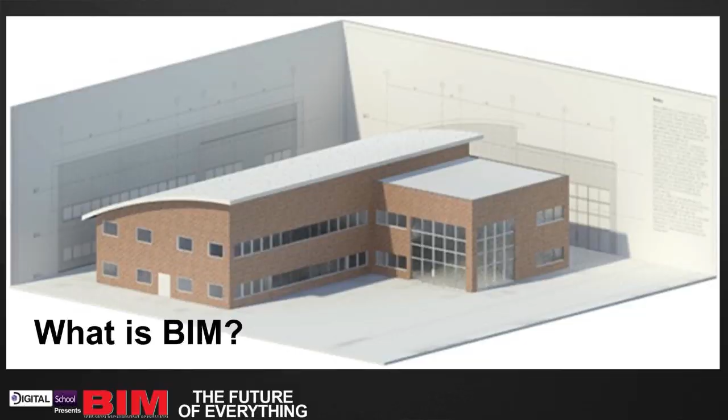So the first question on everybody's mind by now is, just what is BIM? We can think of BIM as two distinct acronyms, although one is more appropriate than the other. They both make sense: one is building information modeling, and the other is building information management. In many ways, they're both entirely accurate.

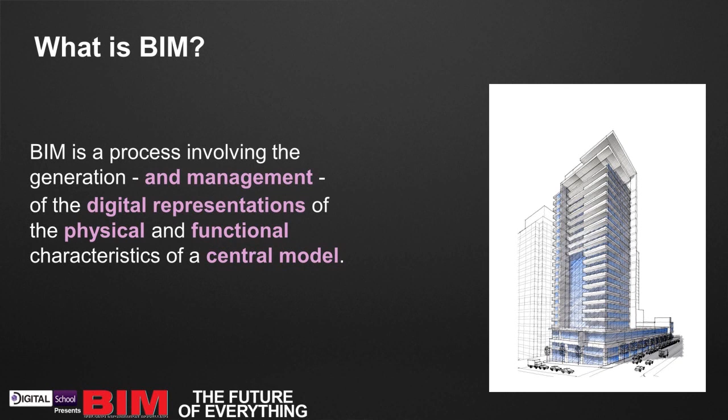BIM is a process involving the generation and management of the physical and functional characteristics of a model, bringing those characteristics into a digital representation. As opposed to regular 3D or even 2D CAD, we deal with the concept of an intelligent central model. Any views—plan views, section views, elevation views, detail views, even tabular views such as schedules or quantity takeoffs—are all interrogations of this central model. The benefit is that if an element or some aspect of the model changes in one view, because it's an interrogation of the central model, all of those views update as a result, including the tabular views, which has great benefits for the management of a BIM model and its documentation.

The resulting models become shared knowledge resources that support decision-making throughout the design process, from the concept to design build, and all the way through the operational life and eventual end of the project.

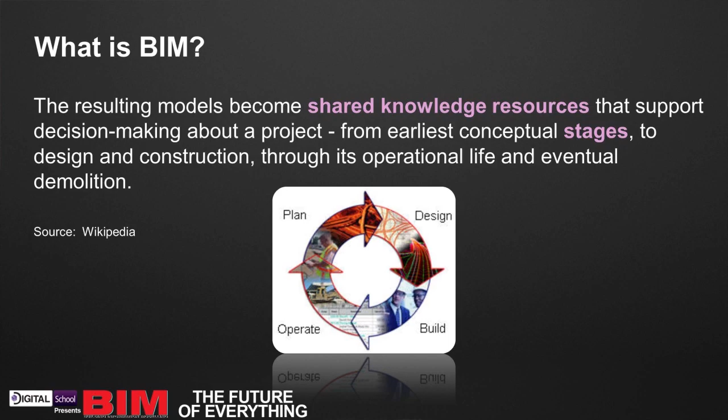So we know of BIM as building information modeling or building information management. The acronym is somewhat proprietary, although it's being recognized throughout the collection of software design industries. But there are other names we can use to describe what BIM is.

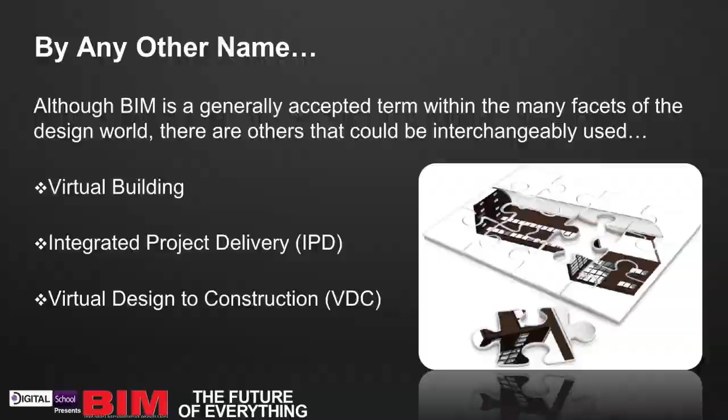Those would be the concept of a virtual building or integrated project delivery. We can talk about virtual design to construction. Each of these have the same idea, where we are looking at an intelligent model, which is a representation of a project that is yet to be developed, or in the process of being developed, or already developed and being managed.

We also think of BIM as being mainly architectural, possibly because there's some aspect of a building in this intelligent information model. But the fact is that a number of sectors using intelligent design software use the same concept, just with different names. In geospatial industries, surveying, or civil engineering, we talk about geographical information systems, or GIS. For ongoing plant or product lifecycle management, we could be discussing facility information management. And more appropriately, we could consider all of these to be asset information management or asset information modeling.

In either case, we're building information into a model so that it can be collaborated and used between all party stakeholders. The main keyword here is information. With BIM, the information is collated, modeled, and managed, all with an understanding and expectation of gaining more information from this intelligent model.

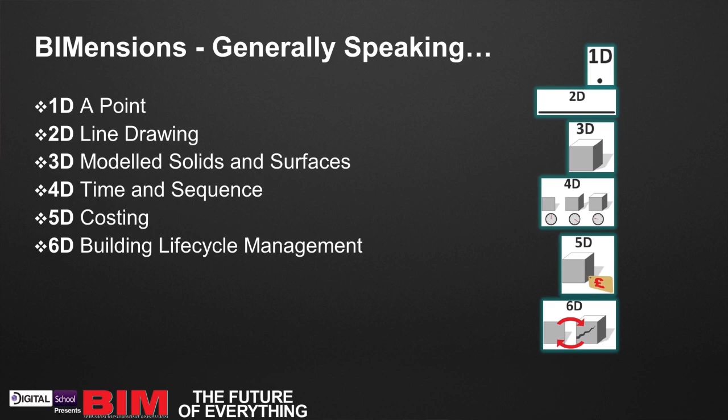But when we add the generally accepted fourth dimension of time, we are making a model that shows how it's going to behave over time, over the course of a year or a decade. We can add another dimension, the dimension of cost, so when we look at a central BIM model, we can determine how much it's going to cost over how much time. Finally, we get into the idea of building lifecycle management or project lifecycle management, where we can manage cost over time of several models all involved in the same project.

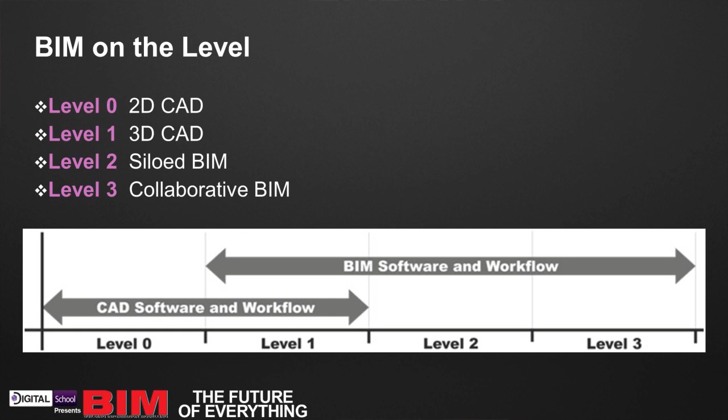Just as there are dimensions for BIM, there are also levels of BIM. Our first level is level 0, which is simple 2D CAD. We won't discuss that much since we're here to discuss 3D BIM or multi-dimensional BIM. But you can see the overlap where CAD workflow and software stops at level 1 and interchanges with level 1 BIM. Then BIM software and workflow expand as we go into the higher levels, so let's discuss some of those.

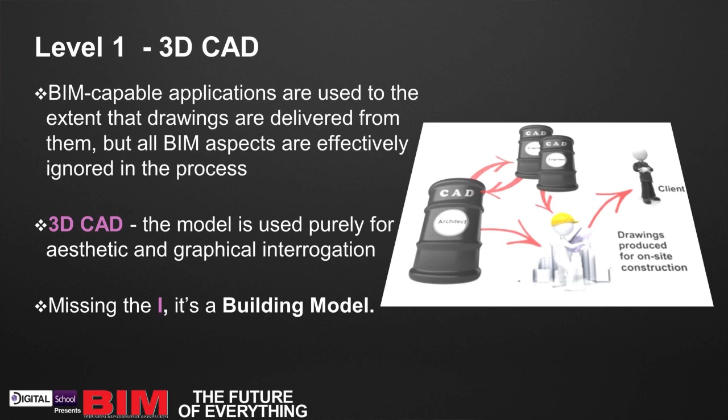When we talk about level 1 CAD or BIM, we're talking about simple 3D CAD. This is a concept where a modeler or designer is using a possibly brand new piece of design software simply as a modeling software. It's simply 3D modeling. There's no intelligent metadata put into the parts. The elements don't know how much they weigh, what they cost, how warm they'll be, or what their draft angle will be. None of the coordination, visualization, phasing, or scheduling elements built into the software are used. We're simply looking at a 3D model, taking the information out of the BIM and left with just a building model.

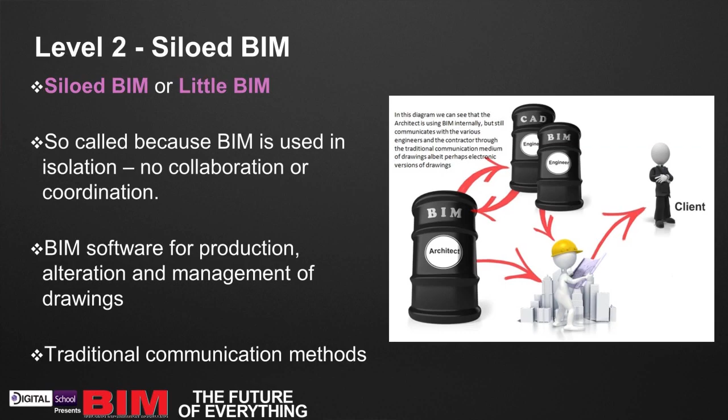As we become more familiar with the capabilities of our software, we start to expand into level 2 BIM. This is also known as siloed BIM or little BIM, because these software capabilities are now starting to be recognized as far as virtualization and other aspects. But the documentation and sharing of that information is still very much in a silo, still very much individualized. Traditional methods of communicating, such as scrolls and scrolls of shop documents or filing cabinets upon filing cabinets of plans, are still implemented, used, and depended on.

When we talk about level 3 BIM, this is where I believe most industries actually are within Alberta and globally. However, there are still areas of gray or areas where catch-up can occur. This collaborative or big BIM, or iBIM meaning intelligent BIM, is where the industry or collection of AEC industries aspires to belong. Here, the software is used fully and functionally as a 3D model for interrogation, analysis, virtualization and visualization. The concept of coordinating several models is utilized more and more, and the ability to analyze the model for temperature, cost, and stress—all these elements built into the model—are now being used fully and functionally.

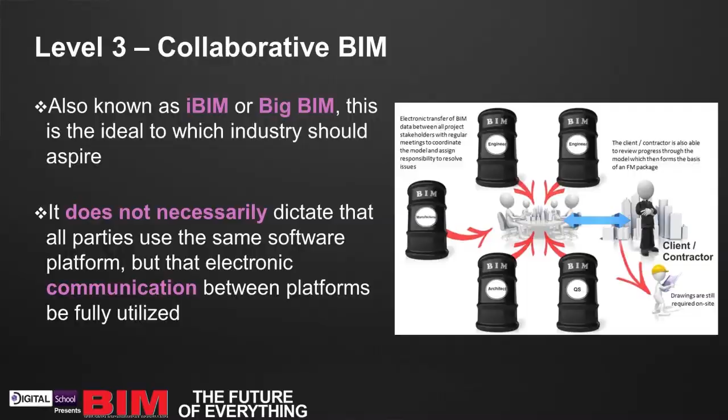This brings up the concept of being software agnostic. Of course, Digital School is an Autodesk ATC, so we deal strictly with Autodesk products. But as most professionals will tell you, they don't work in a strictly software-faithful environment. Most companies will be software agnostic. However, the idea is that if you are a master of one software, it's really easy to see the similarities between the two. And of course, the more technical understanding we as Digital School designers have, the better.

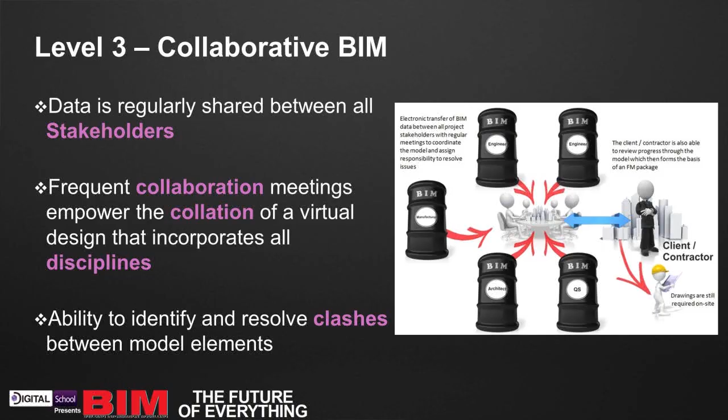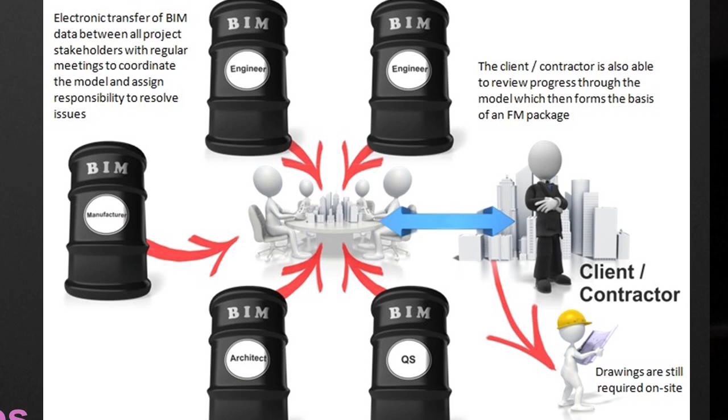One of the concepts of really working with the central model is that data is regularly shared in coordination meetings with all stakeholders. Frequent collaboration meetings empower the collation of all this information, relating to all the disciplines involved in a project. So the HVAC trade contractors can communicate with the structural contractors using clash detection and coordination meetings. The plumbing trade contractor can be told that the main water pipe is in the way of the structural beam, so it has to move. This is easily done with collaboration meetings, and it helps resolve clashes.

Another concept when dealing with BIM is the level of detail involved in a building model. Of course, Rome wasn't built in a day, and neither are building models. In fact, they can start quite simply as simple blocks, or blocks of clay on a design sheet. So level of detail, or level of development, can spell out the expectations of stakeholders in terms of granularity or detail. LOD is often linked to the time and stage of project completion.

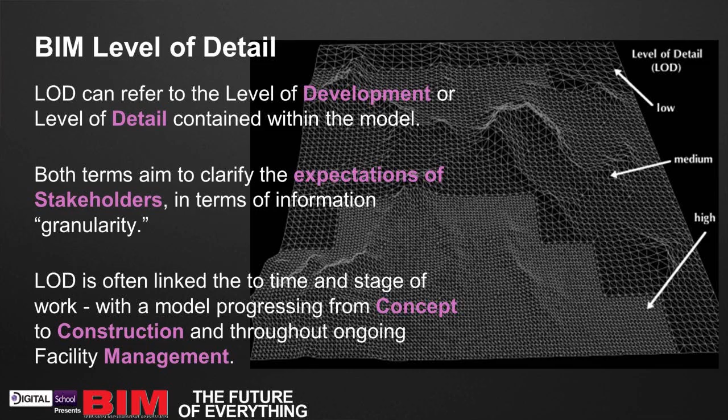As I mentioned, when you're doing strict massing analysis, you don't need all your light fixtures fully articulated—there's just no need for it. As long as you know the volume and square footage or area of the lot you're going to be on, a cube is fine. But as you get further into facility management, the idea of having all those elements fully articulated and intelligent comes into play.

So there are a number of standards globally for the level of detail as they relate to a project. The one that may be more appropriate to us is the level of detail for the American Institute of Architects BIM standard.

So if you look at this graphic, we start with LOD 100, which is strictly a massing, strictly a mass. As you can see, it has no walls, it's strictly a space. It knows what its area is, what its volume is, what its general shape is going to be, but that's all it is, and that's all that's required for the time being.

As we get into LOD 200, we look at the white model, as we see in the middle here. This is our white model as we would recognize in any presentation design as a white paper model, except in a digital form. As you can see, the elements of the building are more articulated, not to a high level of granularity, but enough so that a stakeholder knows exactly what they're getting for their money.

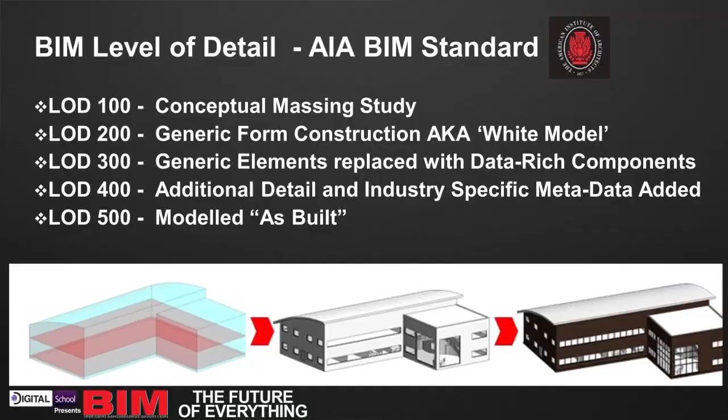When we get to LOD 400, now we start talking about additional detail and industry-specific metadata. So we talk about exactly the type of pump that's going to go into the boiler room, or the type of boiler, and exactly what its cost is going to be. Probably even links to spreadsheets. And all of this information is built into the model.

Finally, we get to LOD 500, which is at the very end, which is our as-built model, which allows us to know exactly what the time it's going to take to build it, what its cost is going to be, how warm the south end is going to be in December, things along those lines.

So we've talked a little bit about the terminology of BIM, some of the words and ideas that relate to BIM on a very high level. And we'll just talk very quickly about some roadblocks or perceived roadblocks that people face as they're implementing BIM in their workflow or their development of content.

So one of the main ones is the time and cost it takes to switch to a new system or a new way of doing things.

Another perceived challenge is a lack of industry standards relating to BIM content or workflow. This is something that's developing as we go along, but some places more than others are slow to catch up. Although there are initiatives globally working to make this a reality, there are still some sectors that need work.

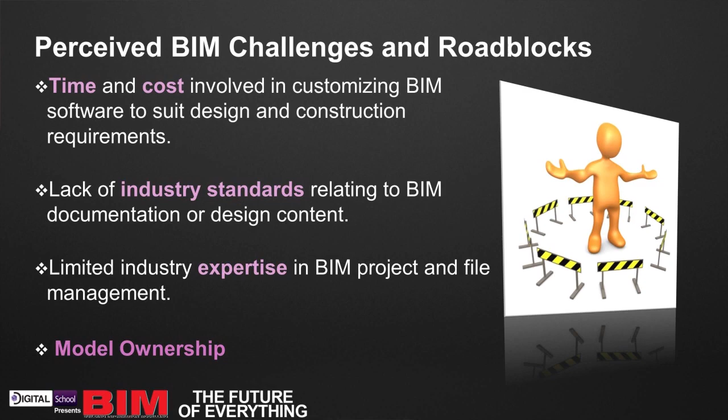Finally, or the idea of limited industry expertise when it comes to the undertaking or ongoing management of a BIM project. And finally, and possibly most importantly, is the proprietary aspect of things. It's a huge question when you're dealing with millions or billions of dollars, who owns that model?

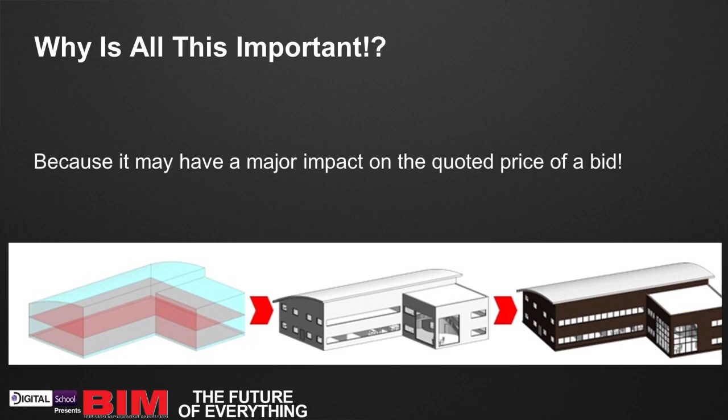The final question is, why is all of this important? And the main question is money. As designers, as stakeholders of any type, everything is based on how much it's going to cost or how much time it's going to take. The efficiency that we can build into a central model and the intelligent gains that we can pull out of a central model equal savings of time, which equals savings of money. And nearly everybody loves to save time and money.

Well, where does that money go? Key barriers such as the lack of uniformity in documentation, particularly with standards, workflows, and schedules were noted. And coordination errors, incorrect material procurement, and labor inefficiencies are always the result.

And as I mentioned, that's just one study in one part of the world. So what about Canada? What's Canada doing as far as its implementation or ongoing work in BIM?